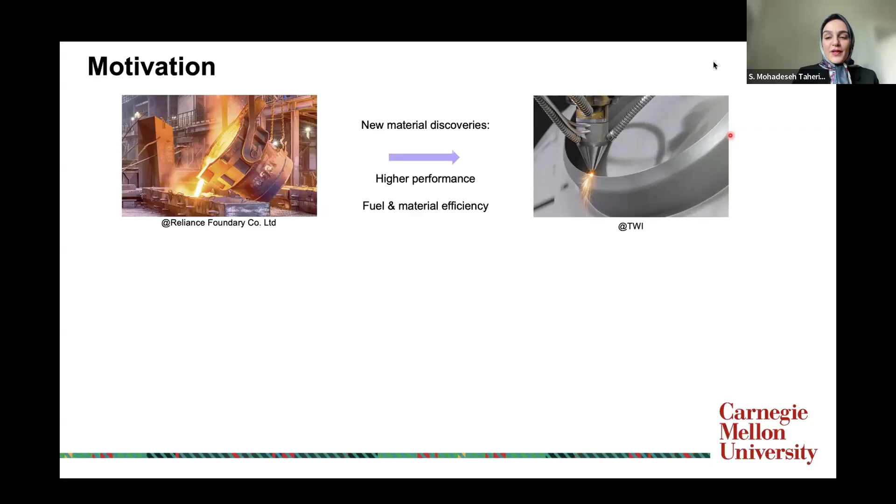But when I say additive manufacturing, we are mainly focusing on two main technologies, which is laser powder additive manufacturing. For example, there is one which is directed energy deposition. In this technique, the metal powders come from tubes, and there's a laser which melts the required additional powder, and then you build your component layer by layer.

In the powder bed fusion technique, there is a metal powder stock. One layer of powder is spread, then the laser passes and melts the required area. Another layer of powder is spread, and you build your component layer by layer.

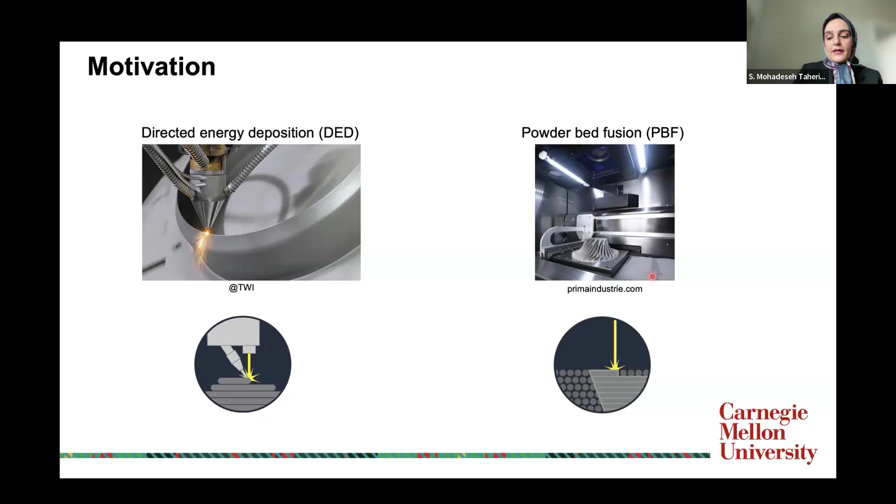So why are we, as alloy designers, interested in additive manufacturing? Because of two main opportunities. One is that we have new processing conditions. Consider that after we add elements together, you have global melting, and when you put it in the mold, it's a slow cooling rate. If we want to do any post-heat treatment, we must do it globally. Here, we just locally melt the additive powder, and we have a fast cooling rate because of the laser interaction, and we also have the ability to locally do post-heat treatment.

The other opportunity is that we can have gradient alloys. When you choose the composition to be melted and the processing, the composition and microstructure, which is what you see under the microscope, are fixed throughout the component. If you want to change it systematically, you have to do systematic post-heat treatment, mechanical or thermal. Here, however, at the voxel size resolution during printing, you can tune the feed rate of the powder from these tubes. Therefore, you can change the composition, you can change the heat, and therefore you can change the microstructure. So at the voxel size resolution, you can make gradient alloys.

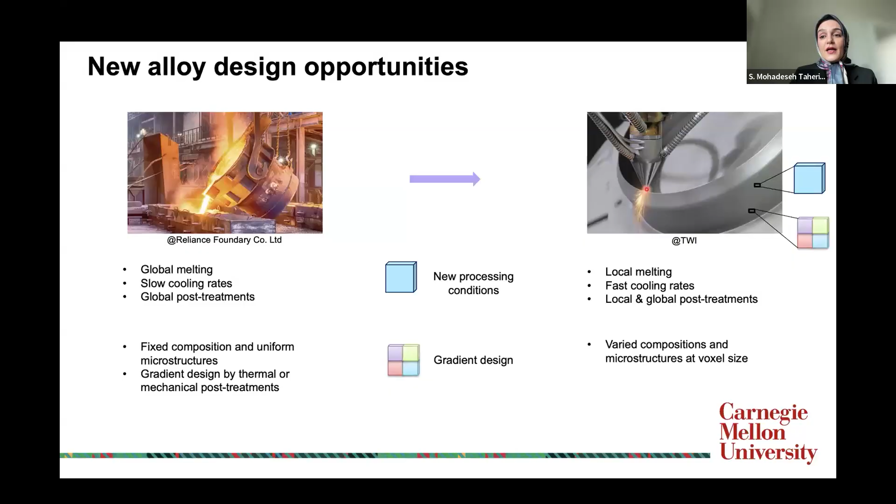But what are the challenges and big opportunities that we are interested to answer? One is that now we can print these alloys with a micron size resolution for industrial applications. However, the properties have a lot of uncertainties. We cannot reliably achieve the properties that we aim for, or what we could achieve with casting. So achieving reliably the properties that we could achieve with casting is one main goal now.

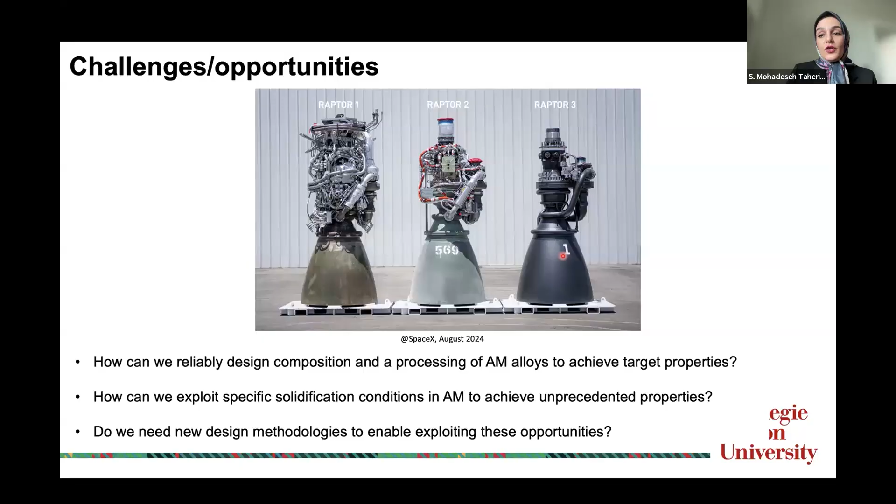Second, as I showed you, we have new opportunities and new tuning knobs during the printing or processing of these alloys. Maybe these new opportunities can enable new designs that we could not do with casting, and we achieve some unprecedented properties that we couldn't achieve before. Third, maybe to achieve the first and second goal, we need new design concepts and new methodologies to help us achieve our design targets.

So I will answer these three opportunities by taking you on the journey of designing high temperature, high strength, additively manufactured aluminum alloys that we undertake in our group.

First, some background: aluminum, after steel, is the most widely used structural alloy in industrial applications. It's in the body of your airplane, especially in the transportation industry, because it's a light element and has higher strength. However, whenever the temperature goes a little high, between 100 to 400 degrees, in applications like fan blades of jet engines, pistons of combustion engines, or vacuum pumps, you'll see other alloys used instead. If you enter any airplane and look out the window, all the fan blades are made of titanium.

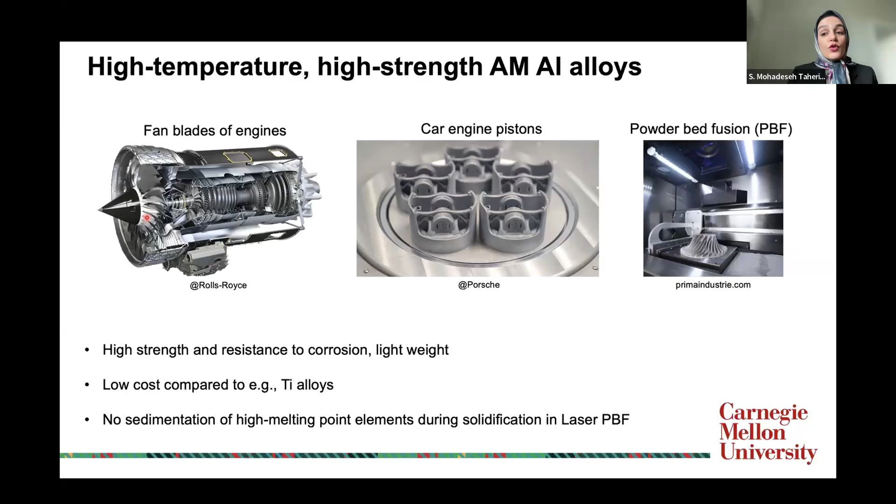Why is this the case? Because aluminum is a light element—you've seen a soda can, yes. But if you want to use it for high temperature applications, you should add a high melting point element to the composition. This element, when you melt everything together in casting, sediments to the bottom of the cast—it's a manufacturing challenge. So we thought that when additive manufacturing, like laser powder bed fusion, came along, maybe this class of alloy could emerge, because you don't melt everything together, you just melt layer by layer. Aluminum is a good choice because it has higher strength, is resistant to corrosion, is lightweight even compared to titanium, and is much lower cost—3 to 10 times lower cost than titanium for these fan blades. Titanium is a bit overqualified for this application.

But when I started this project, back when I was a postdoc at MIT in 2020, the question was: what are the available options in the market?

At the time, although aluminum is a very vibrant class, you cannot print it because you see these cracks during printing aluminum—we call them hot cracks. Because of that, only a few classes of them can be commercially printed. The most famous one was the scandium alloy that has scandium in the composition, which costs two orders of magnitude higher.

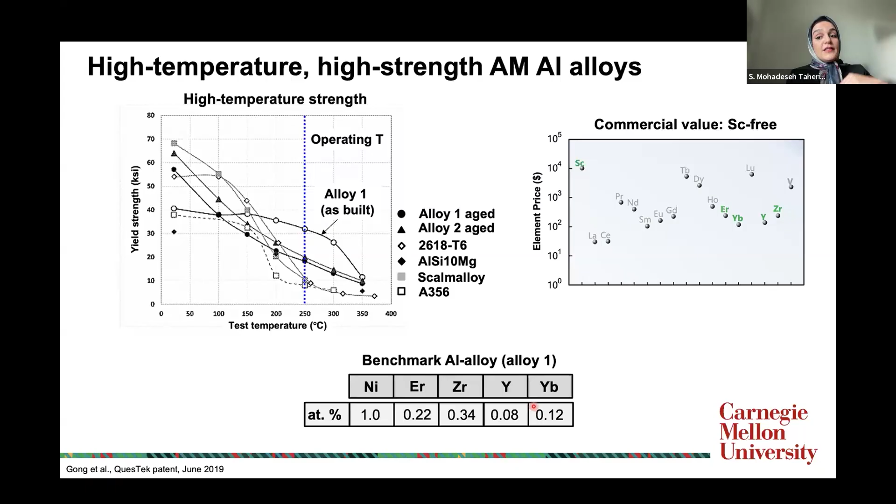But even with the available options, all of their strength significantly drops. My target was 250 degrees C, for a fan blade of a jet engine. At the time, the benchmark alloy that didn't have the highest strength but could sustain strength much better than other options was an alloy patented in 2019, called Alloy 1, with 5 elements: nickel, erbium, zirconium, yttrium, and ytterbium. So the idea was: can I have an alloy with better performance compared to this alloy?

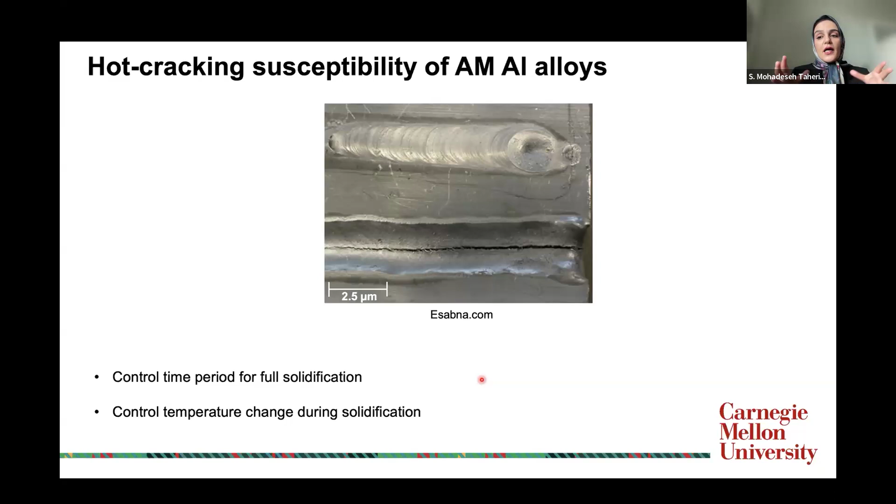You have to design it to inhibit the cracks, and we do it by controlling the solidification characteristics—the time and temperature range during solidification. But we also had an idea to improve the strength of an alloy that I'll share with you here.

We found that within these 5 elements' compositional space, you first have to choose the composition smartly. If you choose that composition smartly and are in the correct composition zone, then if you apply rapid solidification, like what happens in laser powder additive manufacturing, you can lock what you see in the microstructure of the alloy.

Meaning what you see under the microscope in a metastable state. That state is very useful because after printing, you can heat or age the sample, and then you'll see some features inside the sample at the nanometer scale. If you cast or slowly solidify the same composition, you see these features at the micron scale—orders of magnitude different.

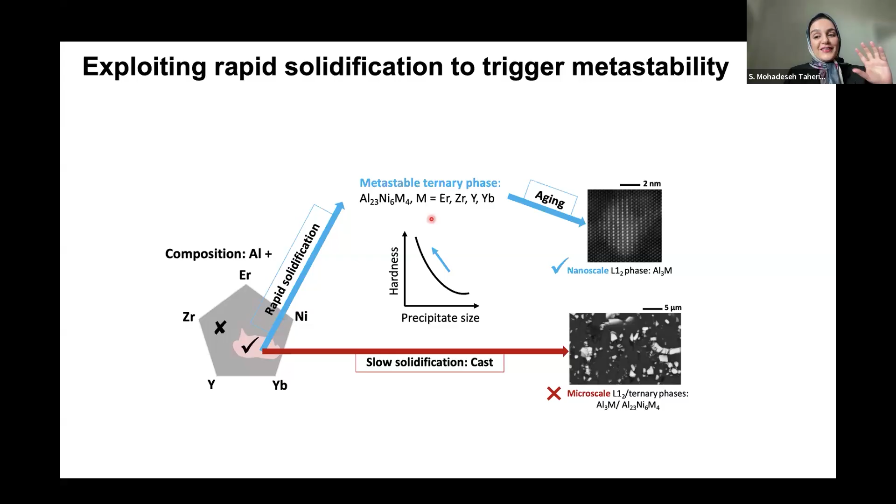And why is this important? Because we know that if these features, called precipitates, are smaller, the material becomes stronger. So although this is our main idea, and we finally made this work, designing an alloy is a complex task.

For example, if I wanted to come up with any new recipe—which element, how much concentration—you should think of this alloy going through powder processing, printing processing, and post-heat treatment processing, each with their own parameters. By fixing the processing parameters, you fix what you see under the microscope of the alloy.

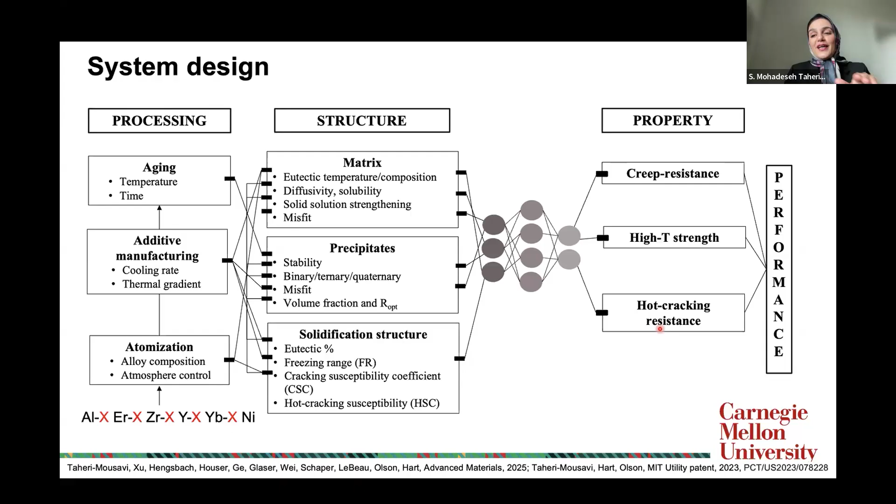There are many features you care about that control the properties you're seeking. For us, that was creep resistance, high temperature strength, and avoiding those hot cracks. So finding a better solution than the record alloy is like playing a domino game—whatever you try to make better, you destroy other properties.

Our idea was to combine our computational technique with machine learning to help us explore this design space and connect the compositional space to properties, doing forward prediction. After developing these functions, which are surrogate models, we use optimizers to do inverse design—meaning we put in a target property and it tells us the best recipe.

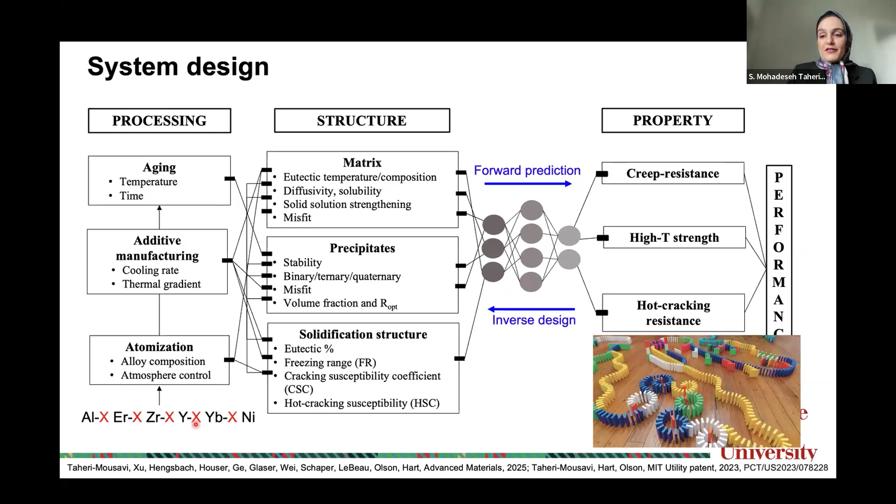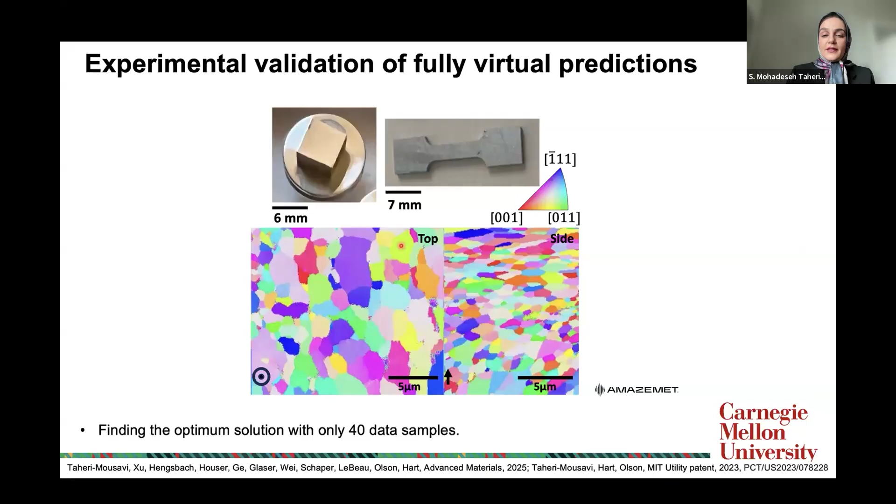With only 40 samples, as we show in this paper, now online, we found a new recipe for the alloy. We ordered custom powder, printed it, and showed our strength was 50% higher than that record alloy, the same strength as wrought aluminum 7075, and it can sustain its highest strength even at 400 degrees C for 48 hours.

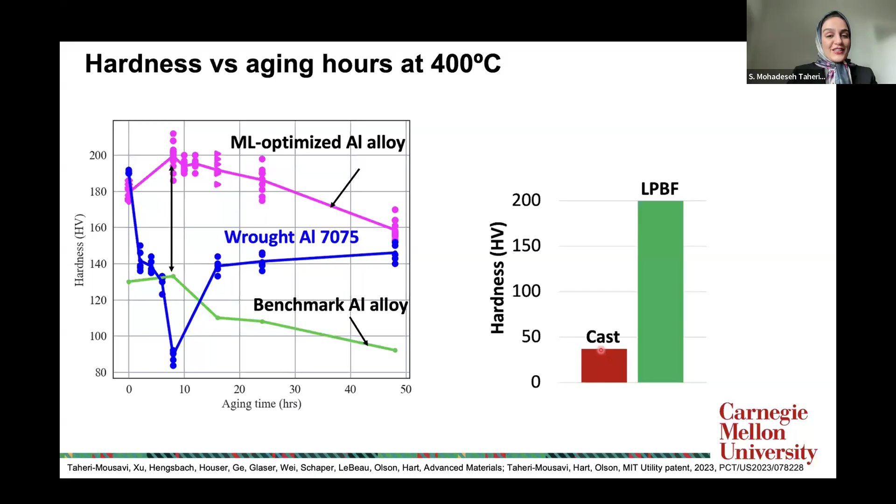We further improved the properties of this alloy because we had a lot of industry interest. The as-built ductility of this alloy, when you do a tensile test, was very limited—and this is very important if you really want to print this alloy at a larger scale.

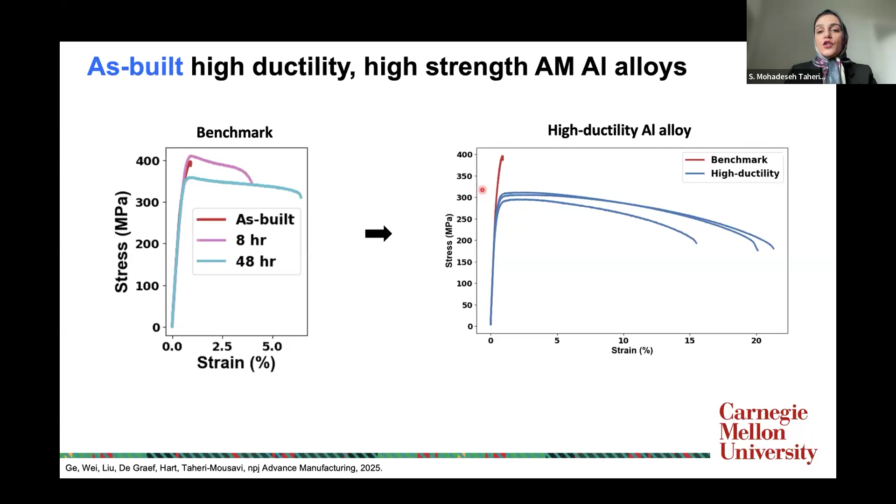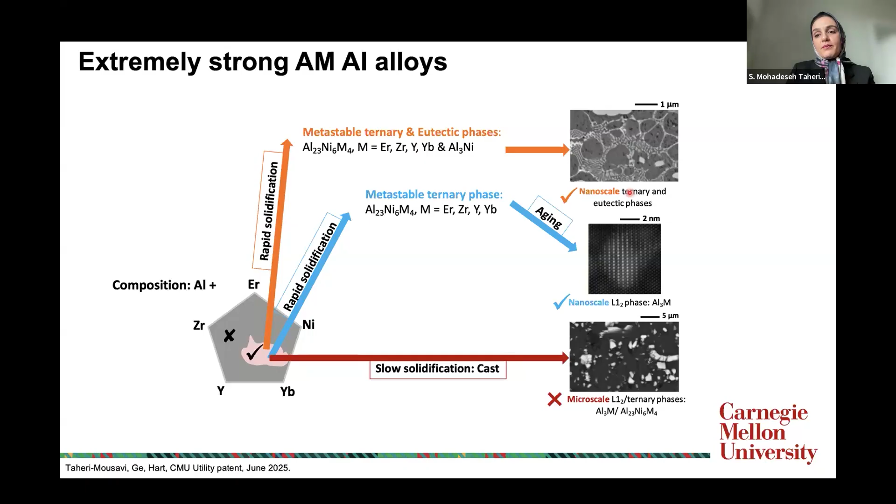We improved the ductility of the as-built alloy to 20%, while only sacrificing 25% in strength. We further enhanced the strength of this alloy by introducing new features in the microstructure to partition the grain and somehow block this plasticity, making it stronger. We achieved a strength of 540, shattering the roof of properties of cast alloy, and now we're approaching the strength of steel. We call it internally a steely aluminum.

Imagine if we can replace steel with aluminum in this application, in this strength range. Aluminum has 3 times lower weight, and you can see how much we can save in energy and in weight of the material, and in general in material use.

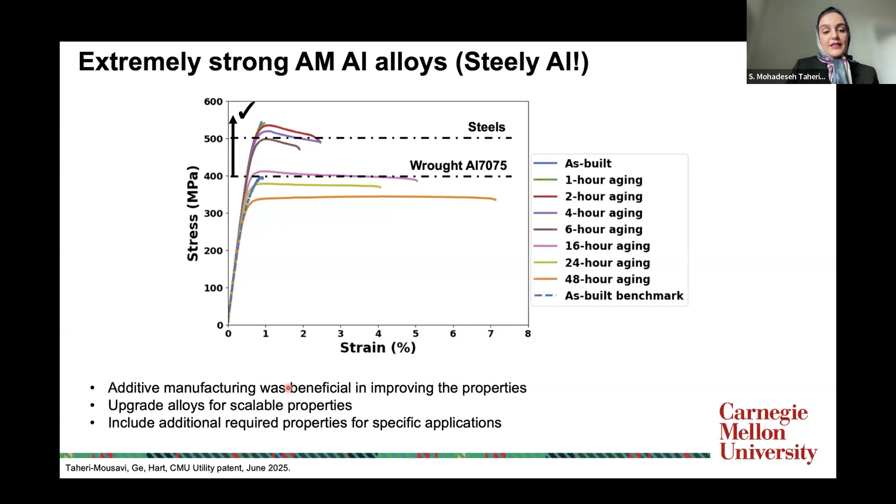So with that, we are now upgrading these alloys for larger scale production, for previous properties, and also including additional properties for specific industrial applications when needed. This is now the start of a large journey.

But we also became interested and got other requests for designing other types of alloys. For example, we entered the design of high entropy alloys, specifically tungsten-based high entropy alloys with rare earths or refractory elements. The previous alloys we designed, we had a very good database, and all those designs were fully virtually designed and validated in experiment. But here we didn't have a good database.

In these cases, you can do some multi-scale simulation, but you cannot fully rely on them 100%. You may have some modality of experimental data, and for some elements you may have constraints because of processing from ore or making powder from them. For designing an alloy, you always want to combine all these modalities and fields of data, and usually there is also a human or literature with some knowledge, and you want to combine all that to decide what experiment to do next, and finally design or find the recipe for the alloy for the target property you're aiming for.

But how can we shorten the loop of this iteration and make the whole process more efficient? We thought the best...

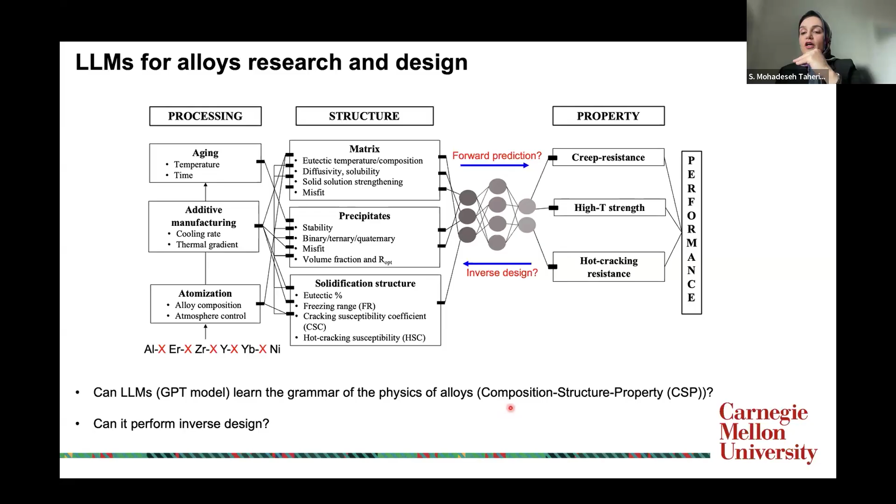...framework to accept all modalities of data is human language, because we all, as humans, understand text, we understand images, maybe audio and video. Especially with the rise of large language models in other fields, and I'm sure many of you have used ChatGPT for everyday use, the question was: can a large language model, such as a GPT model, learn the grammar of physics of alloys and do forward prediction—connecting composition to structure to property—and if it learned, can it do inverse design for us?

In fact, we had a very good database for aluminum. We changed this database into sentences—there are some tricks for how to do that—with a block for the task prediction, meaning for forward prediction: a block of composition or processing, then structure, and then property. We trained our model, and we found it's super smart. If you prompt it with composition, or only composition and structure, and predict structural property or just property, you see it has very high accuracy in prediction.

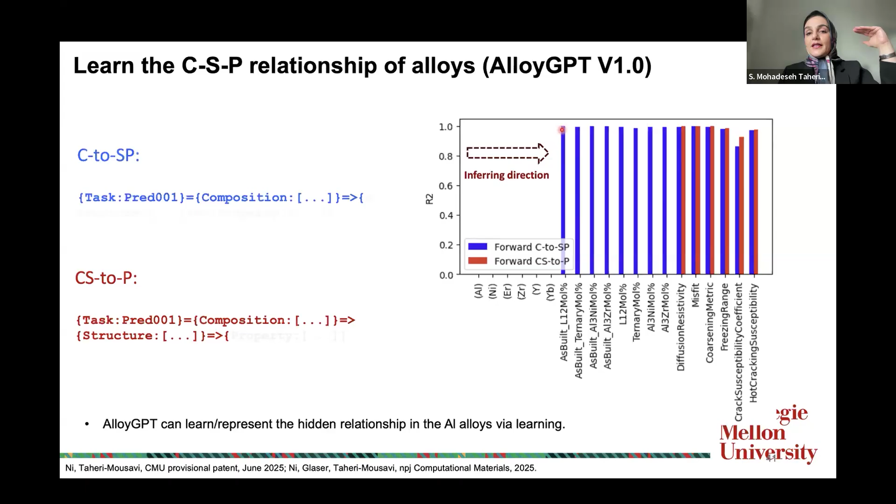But does it also do a good inverse design? We found that although with conventional machine learning techniques you usually need one algorithm for forward prediction and one algorithm for optimization, with generative AI or a large language model, one framework can handle both if you train with both data.

We just changed the task into generating: you now prompt it with property, or property and structure, and we found it successfully could do the inverse design with the same high accuracy. Especially if you only prompted it with a property, we found it could systematically find all diverse solutions that can achieve the same property. As a metallurgist, we know that for a single property, there are several paths of composition and structure that can achieve the same property. We found this probabilistic model can systematically find all these solutions, and that is exciting.

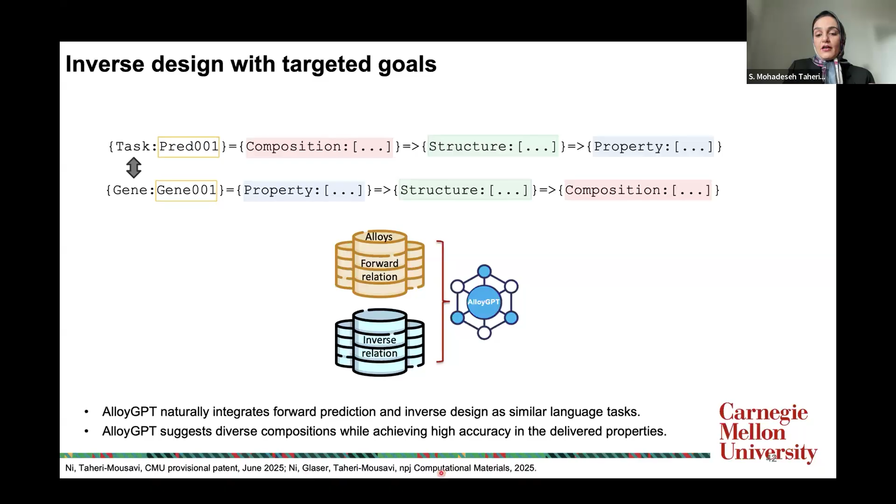The detail of that is in this paper, which was published this summer.

This is very exciting - one interesting new direction is designing gradient alloys. Why gradient alloys? Think of your bones - they're not one material all over; the property changes based on where it's located. Gradient components have better performance, can save weight and cost. Currently we have one material for the whole component, but now we can print gradient alloys. We have a big DARPA project with MIT that we're also part of, and now we can make components with gradient composition.

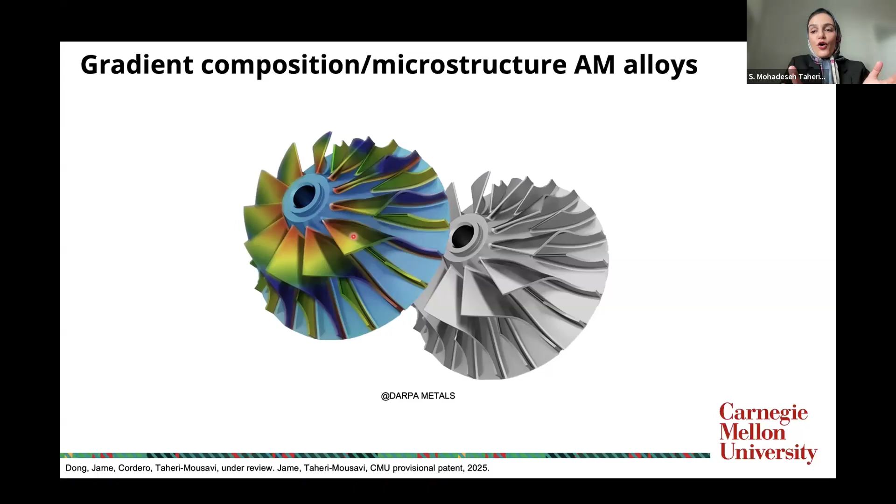Our framework, called AlloyGPT, can systematically give us all the solutions for a target property. For each voxel, if we need a certain property, we have all the solutions based on other constraints - what is the best solution for this voxel? It helps us develop a whole menu of possible materials for each voxel.

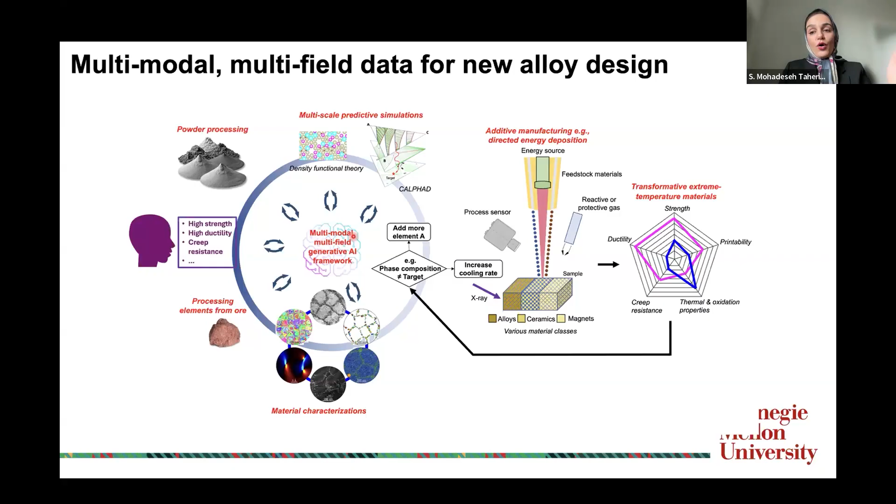We wanted to further accelerate the whole design loop. Currently, it's humans who understand the problem, formulate the plan, retrieve data from literature, apply tools, handle bugs, criticize results, and decide what experiment to do next. We wanted to replace humans with large language model agents, with the human leading these mixed agent teams to be more efficient by automating the whole simulation, thinking, and reasoning process.

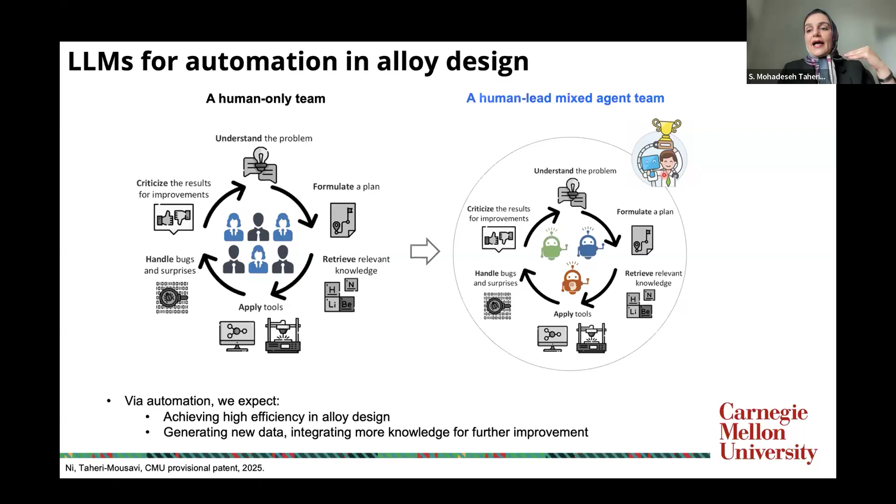We developed agentic AI to automate this. We could prompt it: let's design, for example, an aluminum-silicon alloy composition optimized for good printability in additive manufacturing. We didn't define the metric - it searches the literature, finds the metric, writes the code, runs the code, debugs the code, reasons whether it makes sense, and saves the results in an output file. Despite many iterations of the code, the whole process took less than 5 minutes.

We think this automation in simulation and reasoning will bring a huge savings of time for alloy design. For example, if a PhD student wants to do all these complex tasks, it takes at least 6 months to 1 year of training to achieve this level of coding and reasoning.

This is the final slide. We think that by automating the whole simulation and reasoning, combining machine learning to explore the design space more efficiently, and automating experiments with robots using agentic AI as the brain, we can accelerate the whole design loop for alloys.

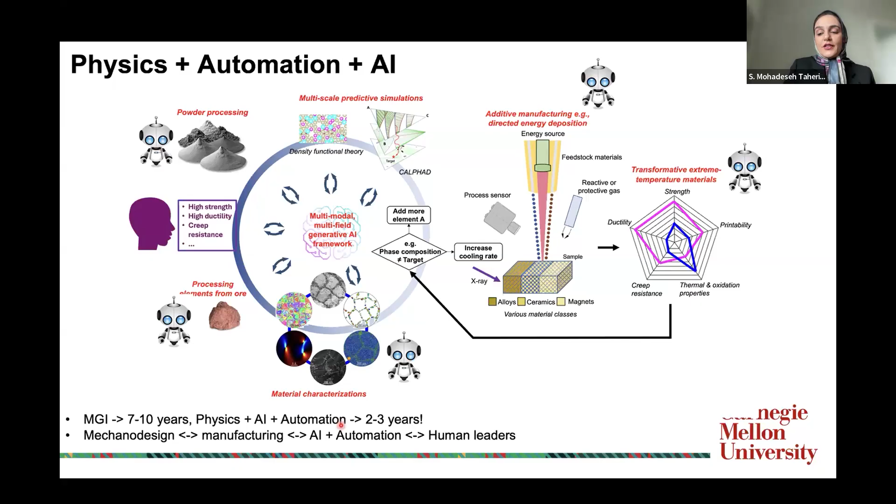Initially, with no help, discovery to deployment of any new alloy for industry took 20 years. After the Materials Genome Initiative, combining with simulation, it decreased to 7 to 10 years. We expect that by combining physics-based models, AI, and automation, this loop will decrease to 2 to 3 years. Thank you very much for joining me in this talk.